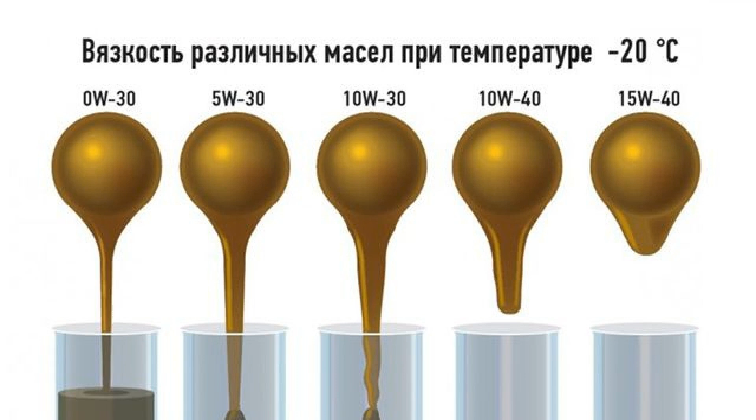Dependence of material viscosity on temperature. The viscosity of engine oil is a variable value, having variable readings at different temperatures inside the engine. In the process of operation of power motors, it has become necessary to determine the dependence of oil viscosity on temperature.

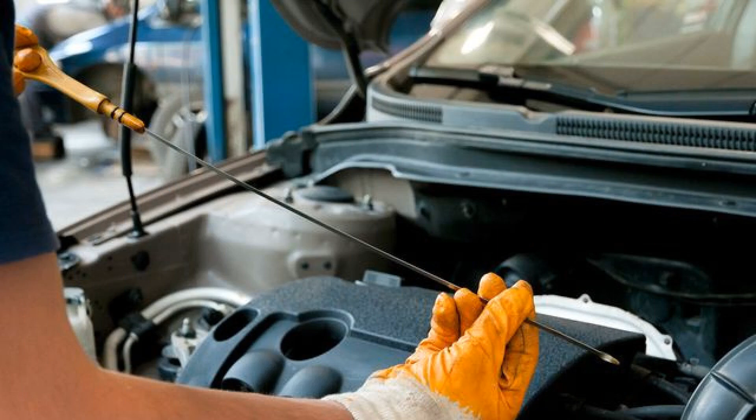The SAE Engineers Association classifies oils by viscosity depending on different temperatures. The developed viscosity table allows determining the limits of possible temperature values in which operation of a given power unit is not dangerous when using a lubricant with certain parameters. Classification of engine oils by viscosity helps to make the right choice when buying a lubricant. Depending on the temperature intervals, the viscosity of engine oil is recorded in a special document. The table is an auxiliary tool for obtaining the necessary information.

Designations in lubricant marking. The marking of engine fluid contains the abbreviation SAE, followed by numerical and letter designations. For example, the most commonly used designation of the brand of multigrade means SAE 5W40. What do the numbers in this inscription mean? To decipher the inscription, you need to subtract 40 from 5... wait, subtract 35 from 5 to get minus 30 degrees Celsius. At this temperature you can start a cold engine.

The Latin letter W stands for winter type, the first letter of the word winter. The numbers after the letter W indicate the density of the lubricant as the temperature rises. The higher the number, the higher viscosity the lubricant will have in a running engine as the temperature rises.

To determine whether a particular lubricant is suitable for a particular motor, it is necessary to use the information contained in the vehicle documentation. The degree of viscosity of the engine oil is indicated on the label on the canister.

Selecting the appropriate lubricant viscosity in order not to make a mistake when buying a lubricant: to choose the viscosity that is optimal, it is necessary to study the manufacturer's recommendations in the service book. It is highly undesirable to use motor oils with unintended viscosity for this type of car and its engine.

When manufacturing a car, the permissible operating modes of the engine are taken into account. On this basis, recommendations are given on the density parameters of lubricants that are optimal for this power unit. Only when the correct lubricant is used will the engine work stably.

The correct choice of engine lubricant should not be influenced by the following data: the date of manufacture of the car, the number of kilometers traveled, driving style, material capabilities of the car owner, incompetence of service station personnel. The parameters of the lubricating fluid to be filled must comply with the requirements set forth by the designers of the power unit.

Dynamics of changes in lubricant density, kinematic viscosity. Engine performance is in direct dependence not only on the absolute density of lubricants, but also on such an indicator as the dynamic viscosity of the oil, which changes at certain jumps in operating temperature inherent in this engine.

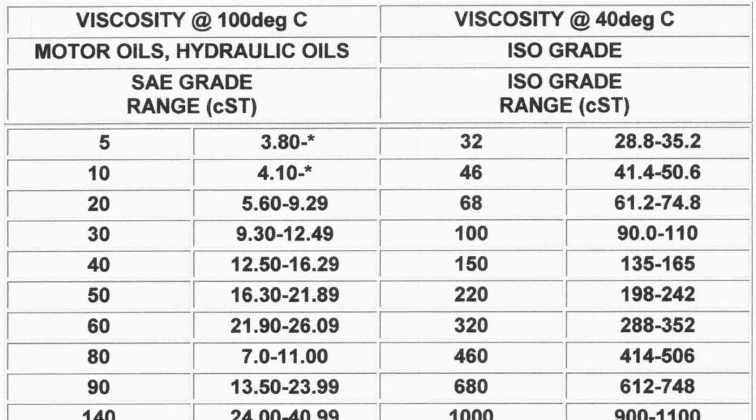Choosing the right lubricant, it is necessary to remember that the dynamics must be suitable for the design features of a given engine. Increased viscosity of engine oil leads to such negative consequences: increase in the operating temperature of the engine, accelerated wear of parts, rapid oxidation and failure of the lubricant, leading to frequent replacement.

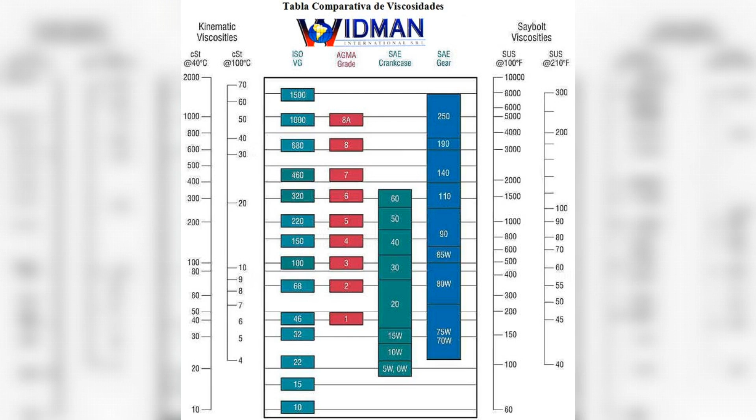Reduction of high temperature density of motor oils below the recommended level is more dangerous for the power unit than its overestimation. With a similar SAE index, such lubricants have quality classes ACEA A1B1, ACEA A5B5.

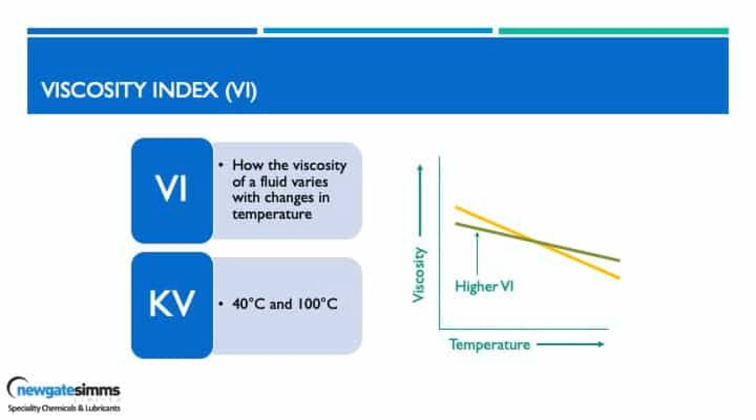These lubricants are used only in special motors. Conventional engines are not designed for low viscosity engine oils. High temperatures and engine speeds lead to intensive thinning of the protective film created on the rubbing surfaces. Lubrication becomes ineffective and lubricant consumption increases as a result of accelerated burnout. Under such conditions, there is a high risk of motor jamming.

Kinematic viscosity of oil is an index characterizing those properties of oil that are inherent to it at normal and elevated temperature, 40 degrees Celsius and 100 degrees Celsius respectively. This parameter is measured in centistokes.

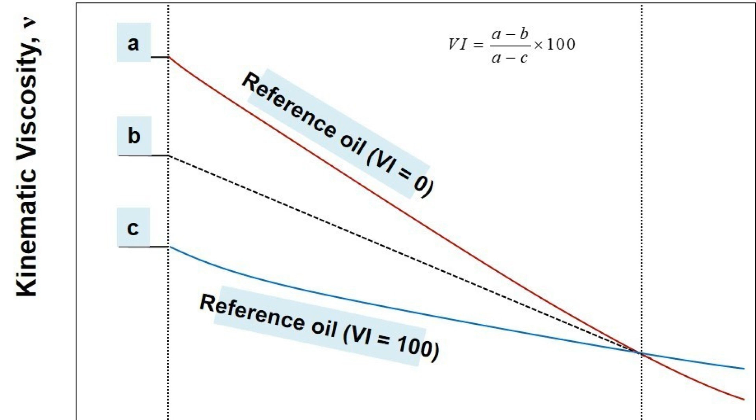Low viscosity oils, in addition to the usual classification of oil viscosity according to SAE, auto mechanics use a modern index HTHS, which takes into account the high temperature viscosity at high shear rate. With the help of this index, the thickness of the protective film at high lubrication temperatures is determined. Based on this classification, motor oils are divided into low viscosity and full viscosity. The numerical value of the HTHS coefficient indicates the degree of protective and energy-saving qualities of the lubricant.

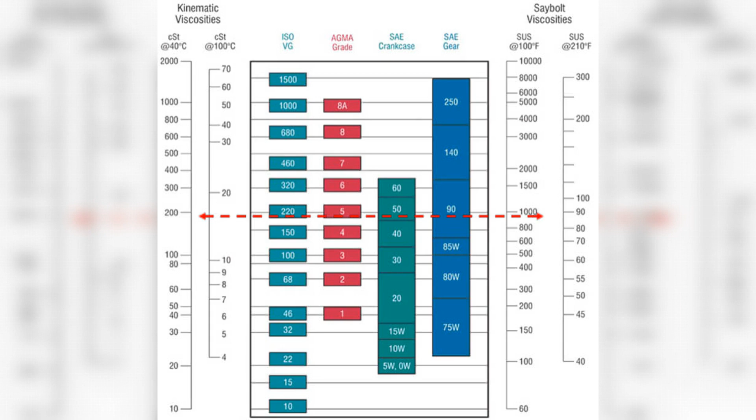Due to the strict requirements of environmentalists in Europe and Japan regarding the amount of harmful emissions, car manufacturers are forced to use low-viscosity varieties of engine lubricants. The use of energy-saving oils leads to reduced friction in engines, which helps to reduce fuel consumption and carbon dioxide emissions. Getting to know oil viscosity stabilizers during operation.

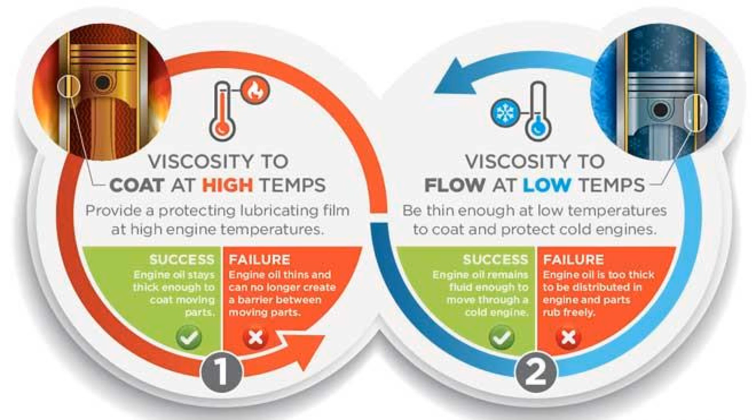Engine lubricant undergoes changes and loses the necessary viscosity. Oil viscosity stabilizer is designed to restore the lost useful properties and bring the viscosity to the required values. The use of stabilizers is indicated for power units of any kind, which have a medium or high degree of wear. When using this product, such indicators improve: increased oil viscosity, increased pressure in the lubrication system, and noise disappears.

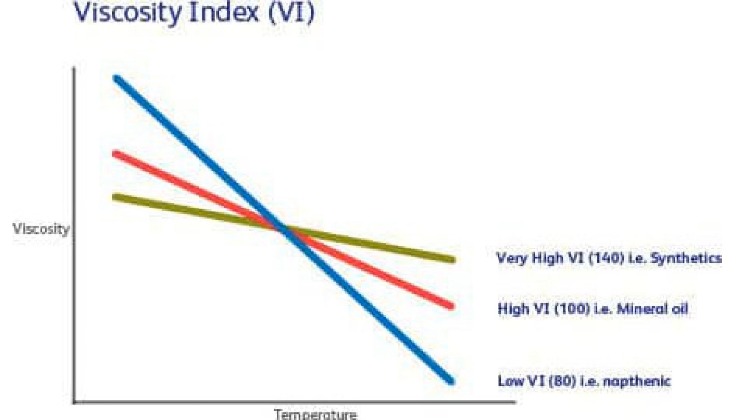Effects on the running engine: a sharp reduction in the amount of harmful exhaust gases, liquefaction and oxidation of lubricant stops. Rubbing surfaces are covered with a protective film, and the formation of soot in the cylinders is reduced.

Due to the ease of use and the resulting effect, lubricant viscosity stabilizers have found widespread use among motorists.

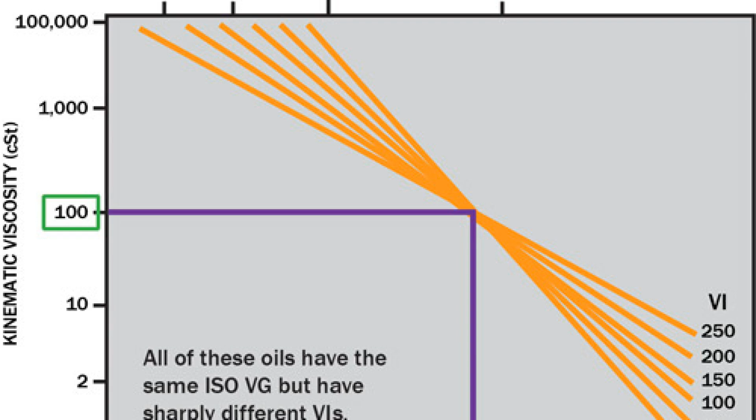Features of hydraulic oil viscosity: low-setting viscosity fluids such as hydraulic or turbine oil are used for lubrication of running parts in northern latitudes at extremely low temperatures. The minimum viscosity of hydraulic oil increases the reliability of the lubrication system. If the right brand of substance is selected, the oil pump receives stable lubrication, and optimal hydraulic resistance is created, which contributes to power equalization and slower wear of motor elements.

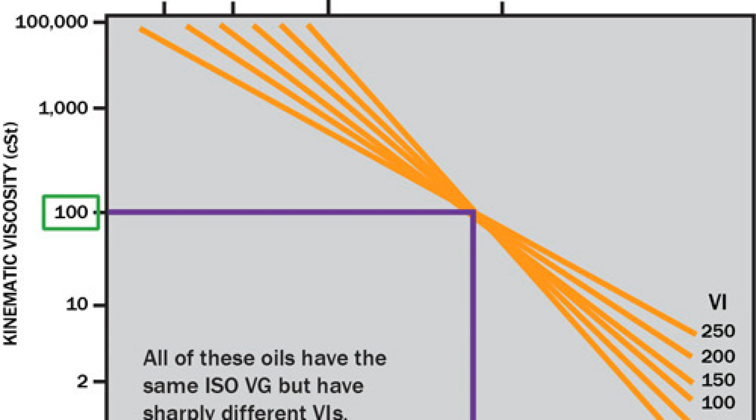Low viscous motor fluids have undeniable advantages. The pluses of 5W20, 0W40 fluids include the following factors: reduction of carbon dioxide emissions into the atmosphere, significant fuel economy, and high efficiency of engine cooling due to rapid circulation of the liquid. Viscosity of vegetable oils.

For industrial purposes, vegetable lubricants such as sunflower and castor oil are also used as lubricants. How to determine the viscosity of vegetable oils? The viscosity coefficient of castor oil, sunflower oil, and other vegetable oils is determined with the help of special installations in laboratory conditions.

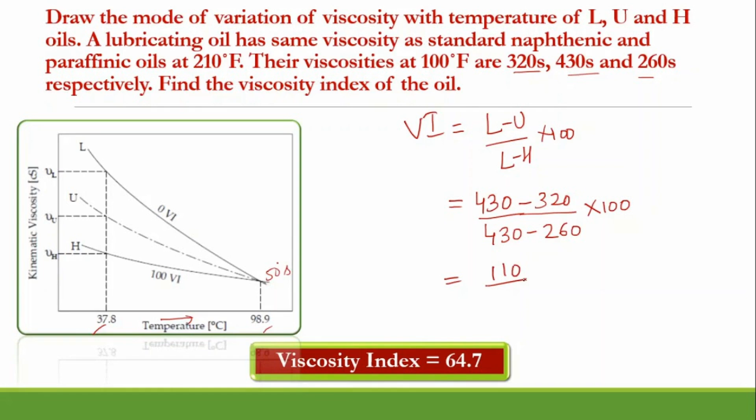Use of machine lubricants in production.

In conclusion, understanding oil viscosity is crucial for selecting the right engine lubricant for your vehicle. By familiarizing yourself with the various viscosity ratings and the labeling on oil containers, you can make informed decisions that enhance engine performance and longevity.

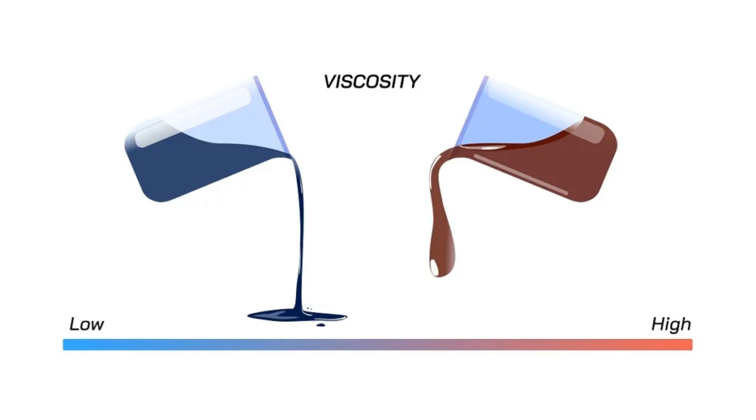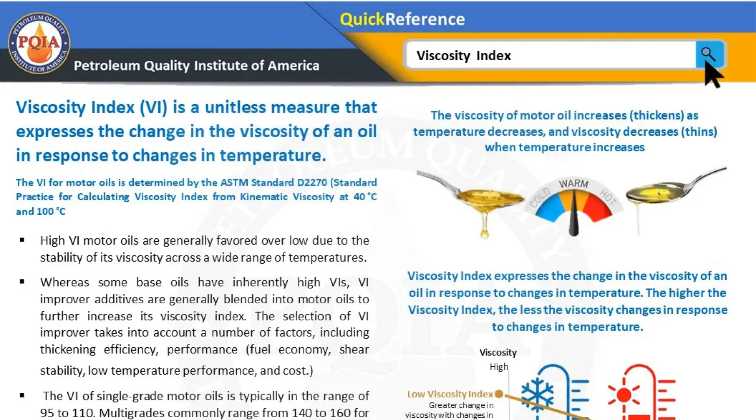Remember that different types of technical oils serve specific purposes, so consider factors like temperature and engine requirements when choosing the appropriate viscosity. Ultimately, selecting the right oil not only ensures optimal engine function but also contributes to overall vehicle efficiency. Thank you for watching, and we hope this guide helps you navigate the world of oil viscosity with confidence.